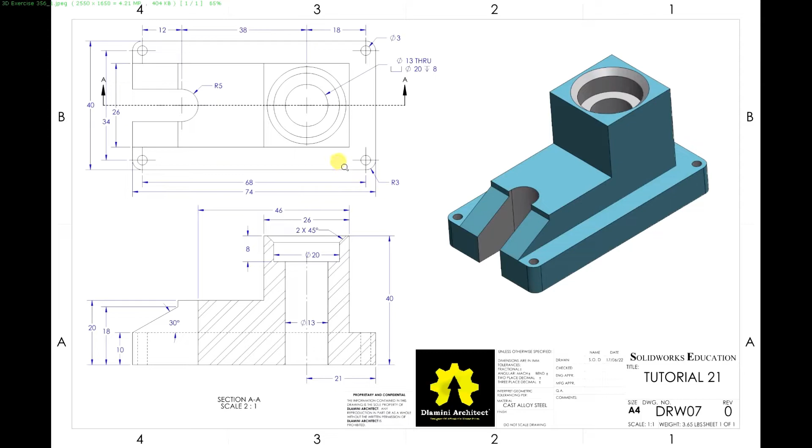Today I will do this simple part for beginners. You can download a drawing to follow along. Okay, let's go. So you start a new part file.

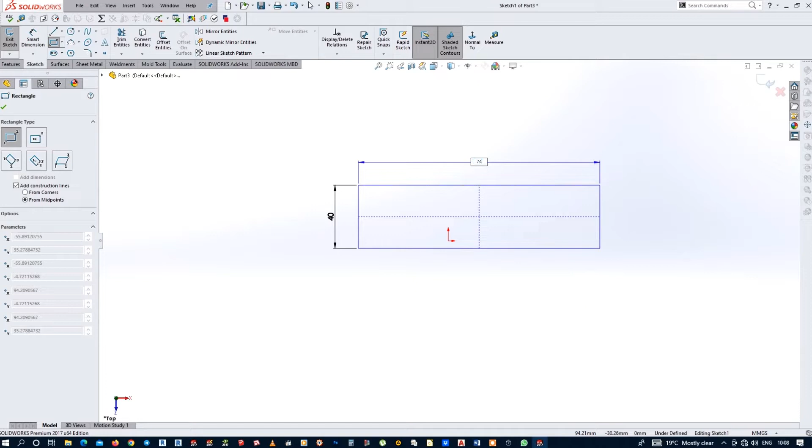Now make a sketch on the top plane. Pick the rectangle tool. It can be any rectangle. You can always center it, right. It's going to be 40 by 74 millimeters. Yes, just pick this and that and go make coincident. That will fully define the sketch.

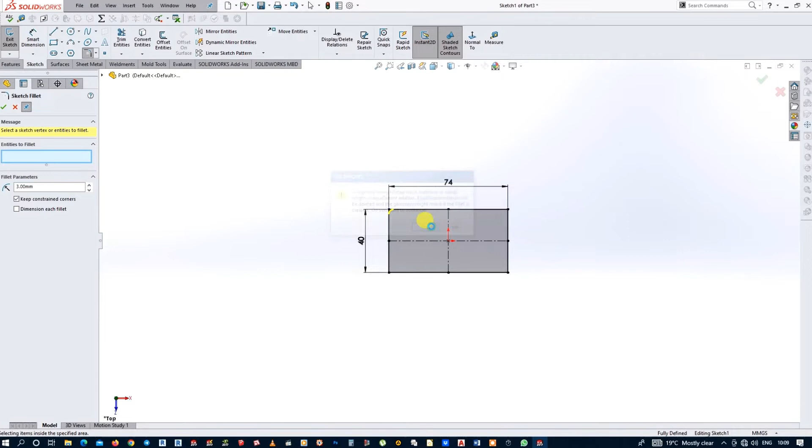Now we'll put some fillets in the corners of 3 millimeter radius. Select the whole thing. Just say yes to this. Fillets applied. Now you make 4 circles. Make them co-radial. Should not be like that. You make them concentric with the fillet. Just eyeball them. We'll define them with a dimension later.

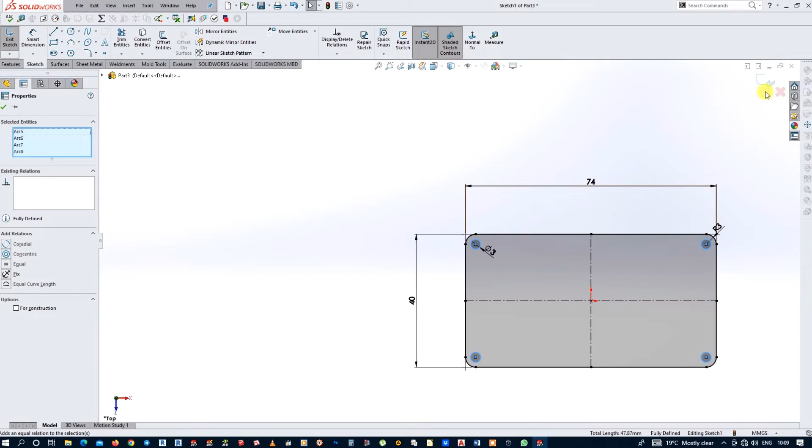That's it. Now these are diameter 3 millimeters for each one. Now select all 4 of these circles. The aim is to make them equal. That will fully define them all at 3 millimeters. Done. Close sketch. Now extrude up to 10 millimeters. That's your first part right there.

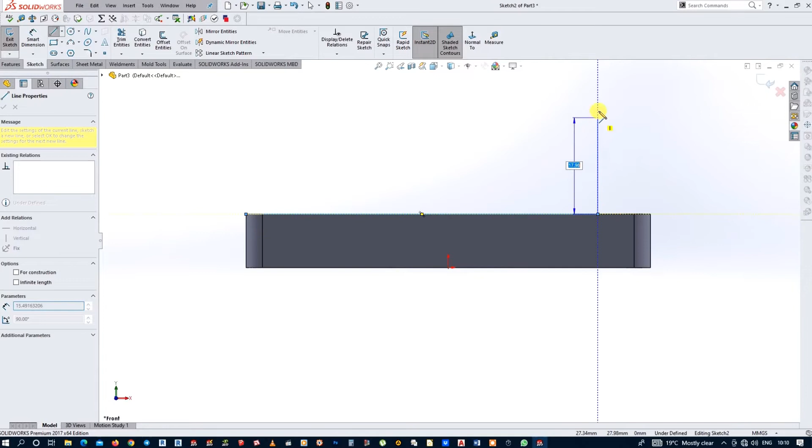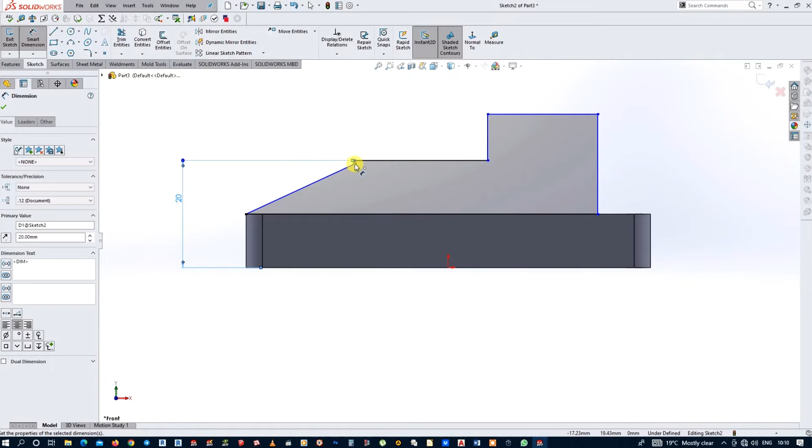Now on the front plane, we'll do the boss on top there. Get the line tool, just make a line, eyeball it, go up, come down, go left, come down slightly, and then close the sketch. Now let's define. Dimension tool, from the bottom to the top of this line here, that will be 20 millimeters. On the step down here to the bottom, make it 18 millimeters.

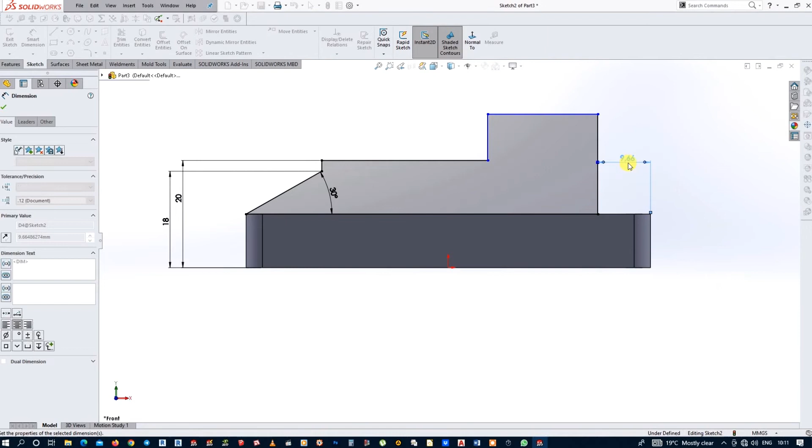This line and that line, put an angle of 30 degrees. Lovely. Now from this edge to this edge, make it 8 millimeters. The overall height of this thing is 40 millimeters. Lovely. Now the length of this line is 26 millimeters. Our sketch is fully defined.

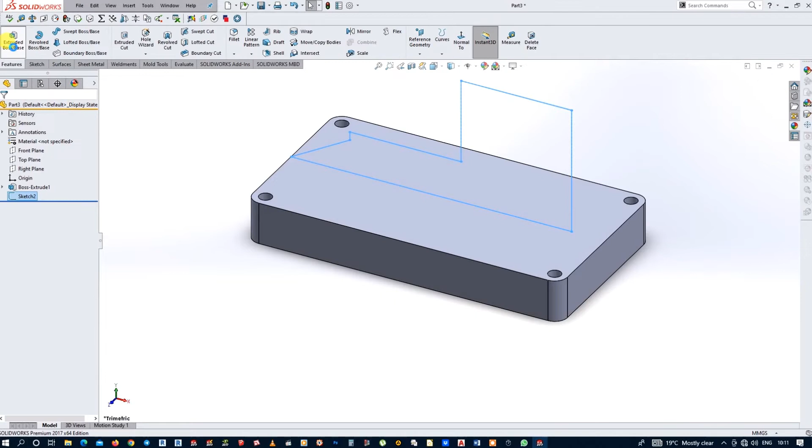Close sketch. Do a mid-plane extrusion of 26 millimeters. Lovely. Now call up the hole wizard. I already used this before, so the dimensions will be there. 13 for the diameter, 20 for the counterbore, and 8 for the counterbore depth. I've done this before, so my settings are already there.

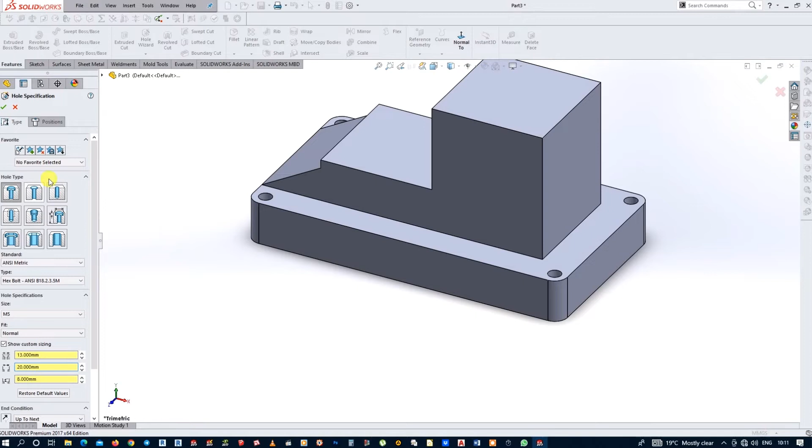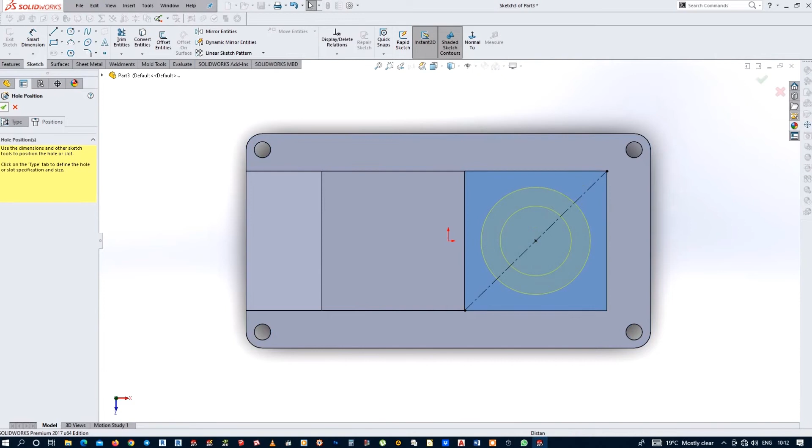Now position the hole, pick the top face, just drop it anywhere. You will define it now. So make a construction line, corner to corner. Now pick the center of this construction line and the center of the dot there. Make them coincident. That will fully define the position of the hole. That's defined, and that's it right there.

Now make a sketch on the top plane. Get the line tool. Draw a line from here where it stops. Just go out and come back. It will come back as an arc. There's your arc right there. And now close the sketch. Now select the center of the line and the center of this arc and the origin. Make them horizontal.

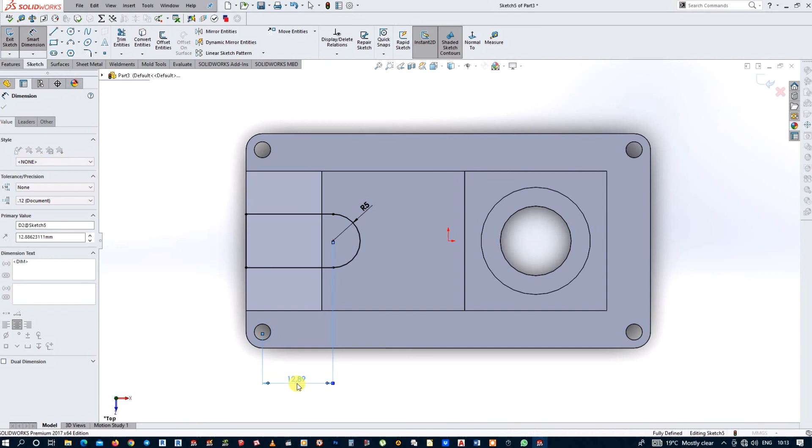The radius of the arc, 5 millimeters. Distance from the small hole to the center of the arc is 12 millimeters. That's fully defined. Close sketch. Extrude cut. Make it up to surface, the top surface. Like this. You got our cut there.

Last thing is to put a chamfer on top, 2 millimeters by 45 degrees. Like this. And we are done.